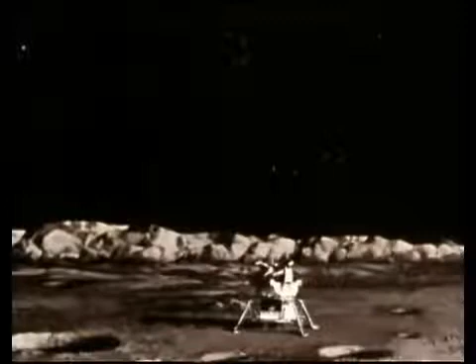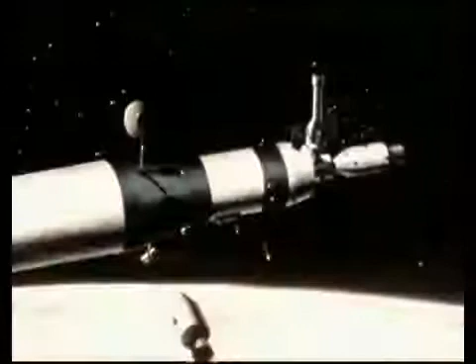Landing men on the moon will be a truly great achievement, but only the beginning of a new era in space exploration. No one can predict the exact missions that will follow in the years and decades ahead. But the most exciting possibilities will require the acceleration and deceleration of very heavy loads, such as the maneuvering of large Earth-orbiting spacecraft.

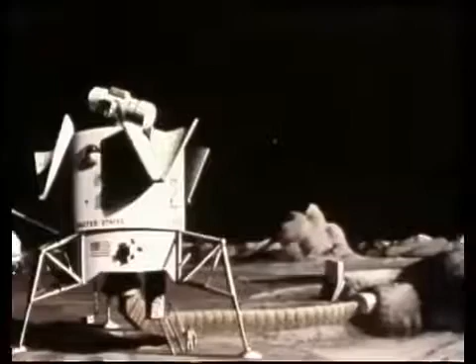The transportation of large amounts of equipment and supplies to the lunar surface, and the sending of heavy spacecraft to the planets.

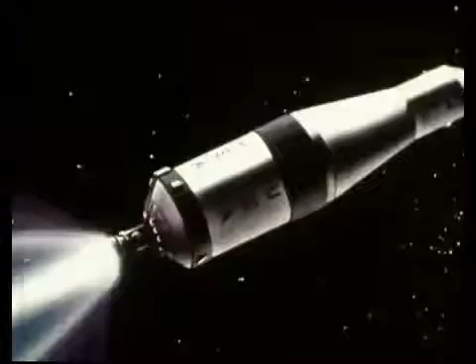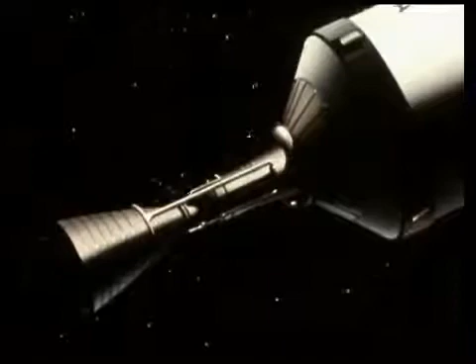Today's missions are being accomplished with rockets that burn chemical fuels. But chemical fuels are heavy, and the cost of putting each pound into Earth orbit is very high. Nuclear rockets, when perfected, can provide the same propulsion energy with less overall weight. They will expand our ability to explore space.

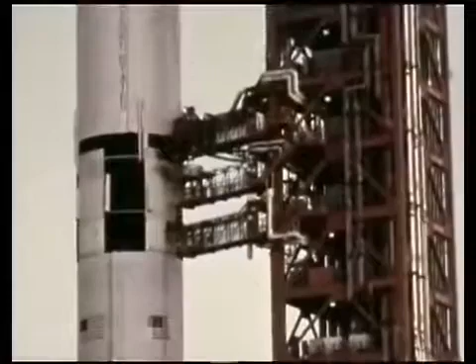This is Saturn V, the most powerful launch vehicle being built by the United States. A three-stage rocket that will place the Apollo spacecraft in the vicinity of the moon. The total weight of Saturn V is about 6 million pounds. Its three stages have chemical engines that burn fuel to generate thrust.

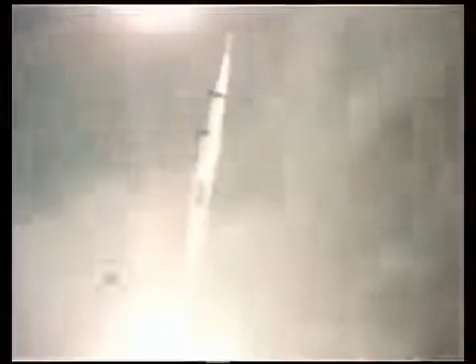The first and second stages provide most of the energy needed to put the third stage and the payload, about 250,000 pounds, into Earth orbit. At present, only chemical rockets can provide the high thrust needed to do this job.

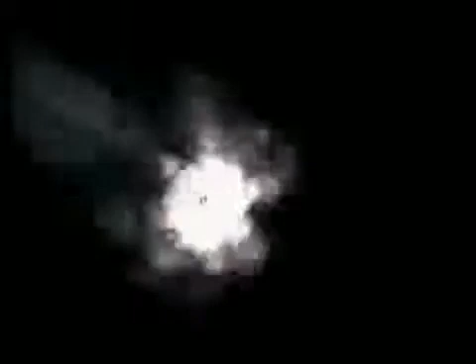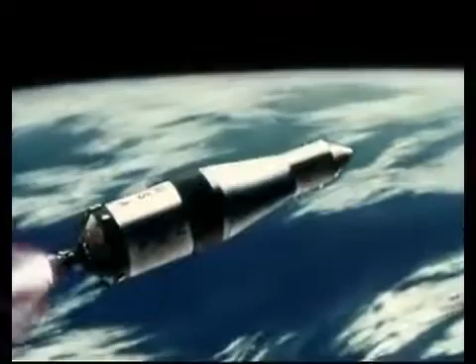The third stage accelerates the payload to the velocity needed to get it to its destination. Here, travel time and payload weight are determined by the efficiency with which the propellant is converted into thrust.

By substituting a nuclear third stage for Saturn V, the velocity of a given payload can be greatly increased, cutting travel time for some missions in half. This is particularly important in sending deep space probes to Jupiter and beyond.

Or if shortening travel time is not essential, propellant weight can be traded off for an increased payload weight. This is important for a lunar supply mission, Earth orbital operations, and some unmanned missions to the planets.

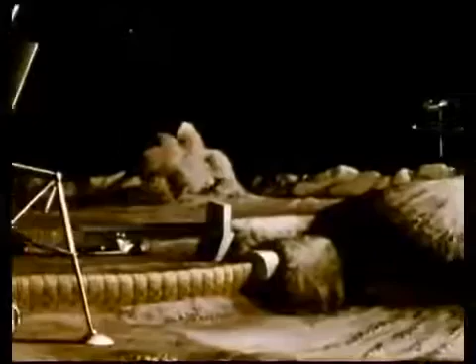Why is the nuclear rocket so much better than the chemical rocket? In rocket propulsion, exhaust velocity determines propulsion efficiency. At a given temperature, the lighter the exhaust gas, the higher the exhaust velocity. And the higher the exhaust velocity, the more thrust is generated for each pound of propellant consumed per second.

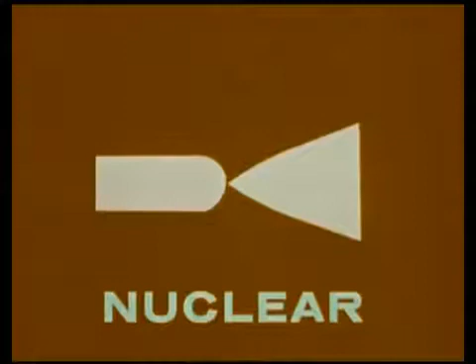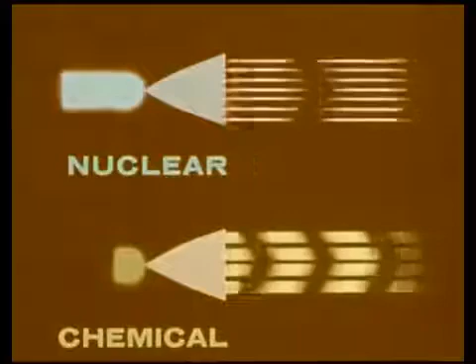The nuclear rocket merely heats hydrogen, the lightest element of all, and expels it at tremendous velocity. Chemical rockets burn fuel to produce exhaust gases that contain heavier elements. So at the same exhaust temperature, the exhaust velocity is much lower, and each pound consumed per second produces less thrust. Rocket efficiency is stated in seconds of specific impulse.

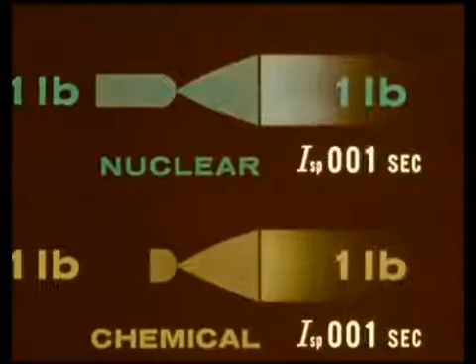This refers to the time in seconds that 1 pound of propellant will deliver 1 pound of thrust. The higher the seconds of specific impulse, the greater the propellant economy. Our best chemical rockets of today are limited to a specific impulse of about 450 seconds, and only slight improvement can be expected.

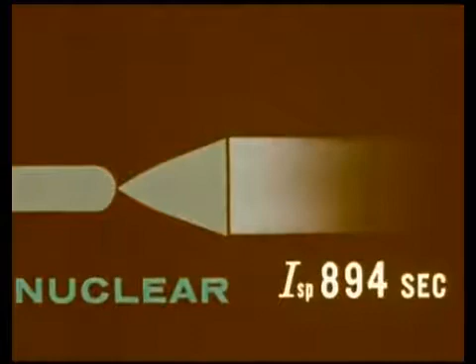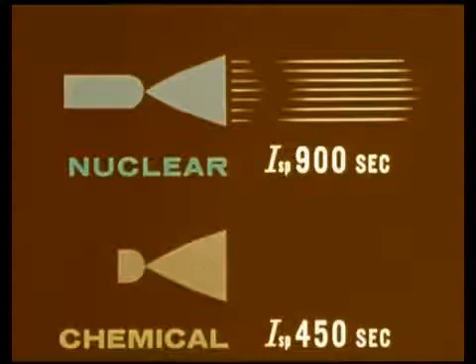On the other hand, full-scale nuclear reactor tests have achieved 800 seconds, and laboratory tests promise even more, perhaps as much as 900 seconds. This means the nuclear rocket, with its lightweight, high-velocity exhaust, will use propellant about twice as efficiently as chemical rockets. This, then, is the principal advantage of nuclear propulsion.

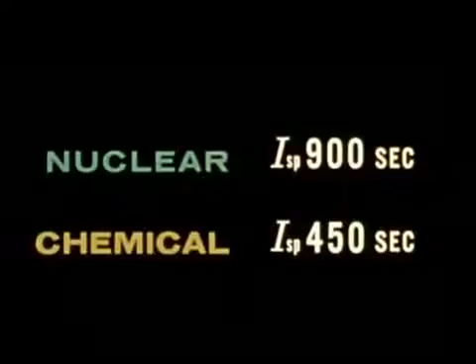It was at the AEC's Los Alamos Scientific Laboratory, high in the mountains of New Mexico, that the first steps were taken. Here, in the mid-1950s, scientists set about to determine if nuclear energy really could be used to provide rocket propulsion.

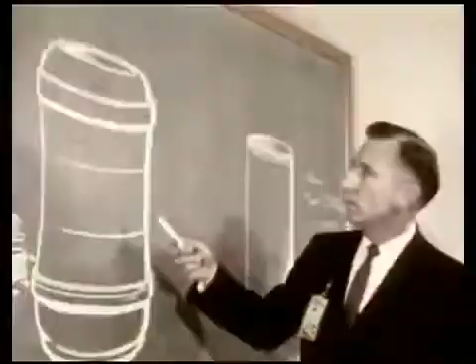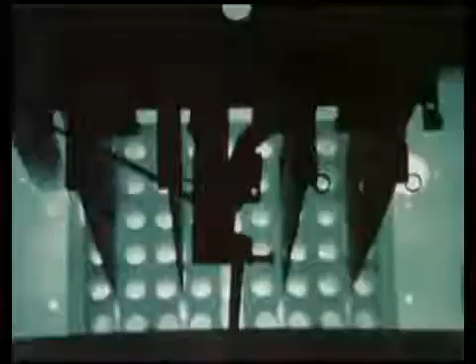Theoretical studies and early experimental work revealed many problems that would have to be solved. Problems in reactor design, material, radiation, structures, control, to name but a few. The nuclear rocket was found to be feasible.

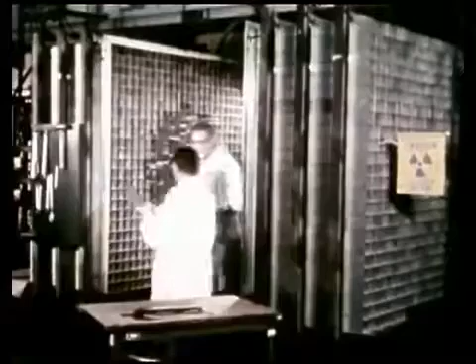A series of experimental reactors was planned to convert theory into workable hardware. Optimum reactor designs were worked out by analysis. Prototypes were built. A comprehensive test program was started.

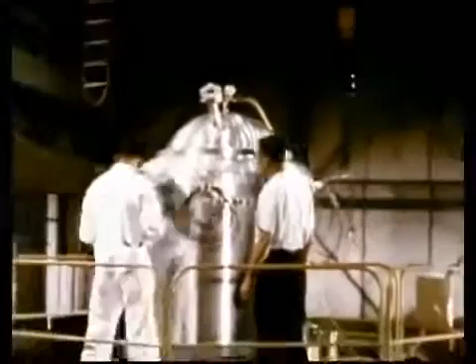These reactors, called Kiwi, were to be used to prove out design and operational concepts. They would be built only for ground testing.

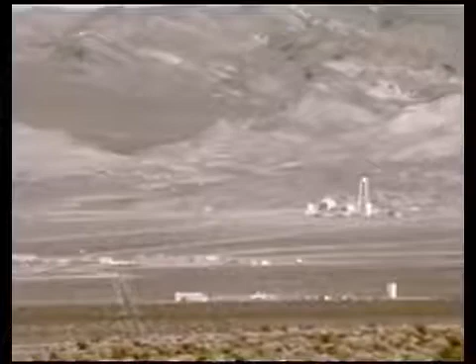All Kiwi power tests took place at the Nuclear Rocket Development Station at Jackass Flats, Nevada. Here in the desert, scientists and engineers checked the actual performance at various power levels and for various time periods.

Each experimental Kiwi reactor was received in sections, assembled and checked out in a special reactor maintenance, assembly, and disassembly building called simply RMAD.

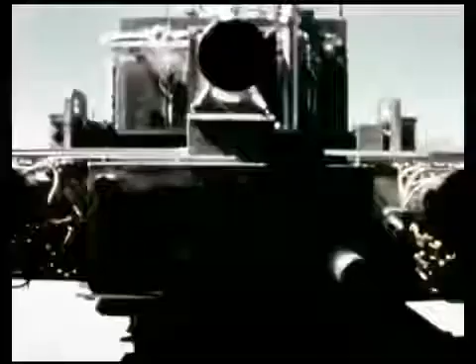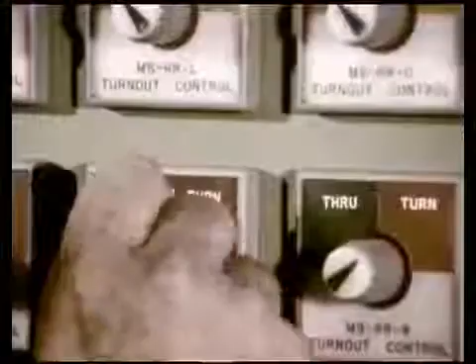When the reactor was ready for testing, it was placed nozzle up on a special rail car and delivered to the test stand a mile or so away. This car could be controlled from a remote station. Liquid hydrogen from nearby storage tanks was pumped through the reactor.

First tests were begun in 1959 and were run to the 100 megawatt level, about 1/10 of Kiwi's ultimate goal of 1,000 megawatts.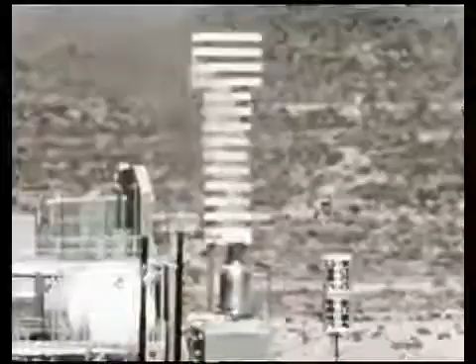Later tests, beginning in 1962, operated at the full 1,000 megawatts.

Films of these early tests show the flaming torch on the test stand that burns off the hydrogen exhaust gas and prevents an explosion hazard to the test facilities.

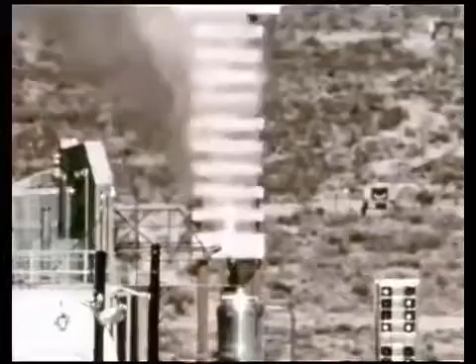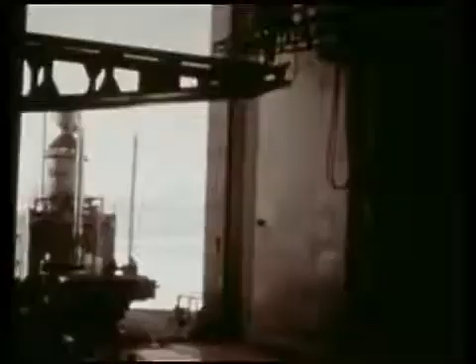Upon completion of these tests, each reactor, by then radioactive, was transported by remote control back to the RMAD building for disassembly and inspection. Here, men working behind shielded walls used remote-controlled manipulators to remove the components for careful checking and analysis. Each test firing added information that helped scientists evaluate the reactor's performance and enabled them to make adjustments and corrections before the next reactor was assembled.

But not all tests showed perfect performance. In this one, for example, the flashing in the exhaust gas indicated a structural breakup caused by excessive vibration. Extensive redesign and testing were needed to correct the flaw.

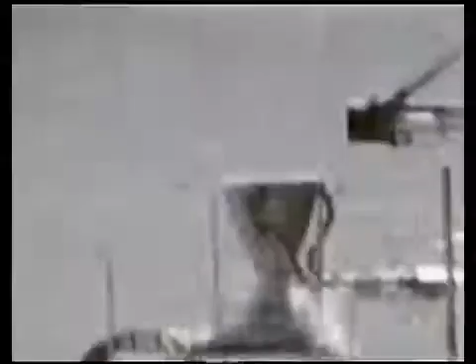And in this test, a hydrogen leak caused a fire on the test stand. Again, a correction was made.

Each test brought the scientists a little closer to the performance they were seeking, until finally, in September 1964, the 8th Kiwi reactor was brought up to full power and held for 8 minutes. A few weeks later, it was restarted and operated at full power for 2.5 minutes. Specific impulse, about 750 seconds.

This concluded the Kiwi test series. It had proved that a nuclear reactor could be built that would power a spacecraft.

The next step, already underway, was to develop complete engine technology. This project was called NERVA, Nuclear Engine for Rocket Vehicle Applications. It was to be a combined industry-government effort headed by the Space Nuclear Propulsion Office, a joint NASA and Atomic Energy Commission activity. The principal contractors were to be Aerojet General Corporation and Westinghouse Astro-Nuclear Laboratory.

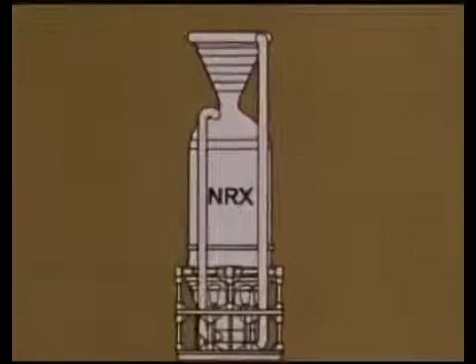The NERVA technology reactor, given the letter designation NRX, was essentially the same as Kiwi, but now the contractors had to extend its lifetime and put it into an engine configuration.

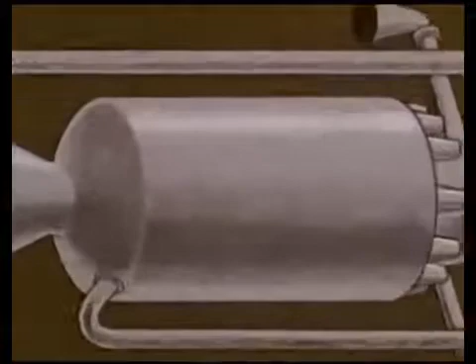Here is how the nuclear rocket engine will work. The reactor is a solid core, heat exchange type, cylindrical in shape. Fission of uranium atoms in the core is the source of heat. A reflector made of beryllium surrounds the core.

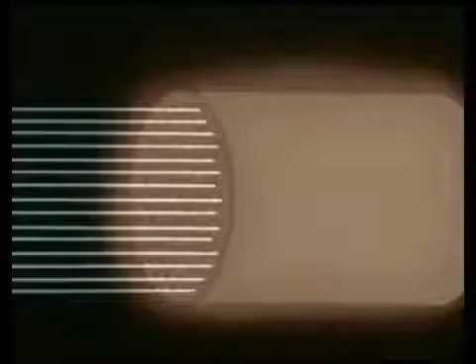The core consists of many graphite elements impregnated with the uranium-235 fuel. The core contains a number of channels running down its length. Hydrogen passing through the channels picks up heat generated by the fission process. The channels are coated with niobium carbide, a material which resists the corrosion that would occur if the hot hydrogen were allowed to come into direct contact with the hot graphite.

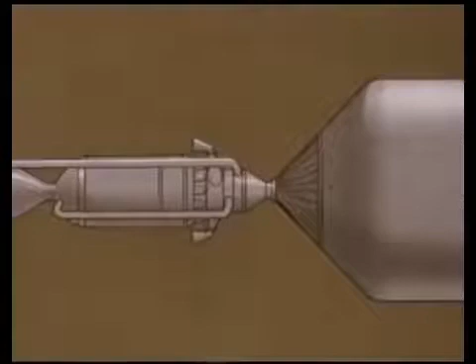The hydrogen is stored in a liquid state to achieve the lowest possible volume. The flight model will use about 1/3 of a million gallons for a 30-minute firing.

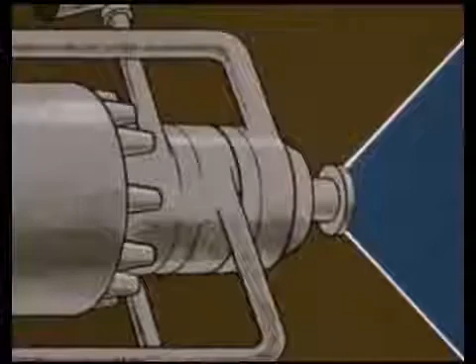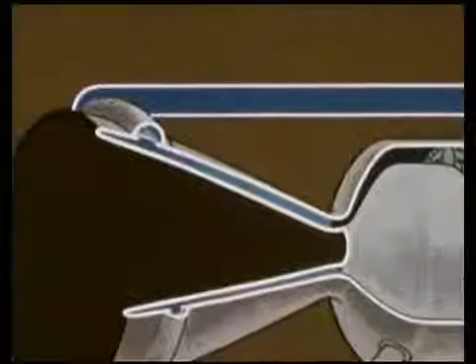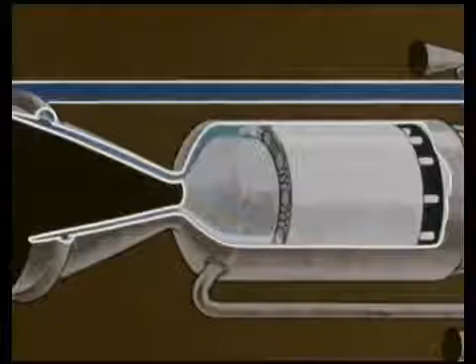To start the engine, the cold liquid hydrogen at -420 degrees Fahrenheit moves through a pump down to the nozzle, through internal passages in the nozzle walls, and back up inside the reactor pressure shell and reflector. This cools the nozzle, the reactor shell, and the reflector, and at the same time warms the hydrogen.

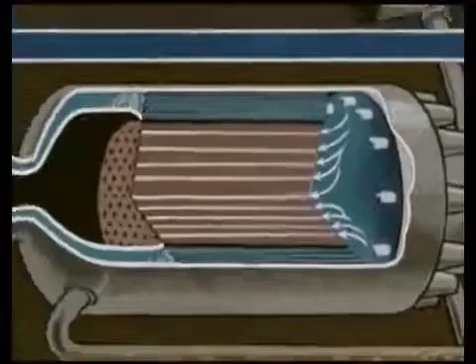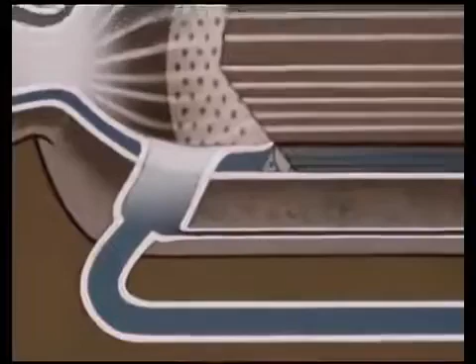The hydrogen then passes through the hot fuel elements where it is heated to about 4,000 degrees Fahrenheit. From there, it is expanded through the nozzle to provide thrust. The bleed line carries some of the hot hydrogen back to drive the turbo pump. The whole engine system is amazingly compact for a nuclear power source.

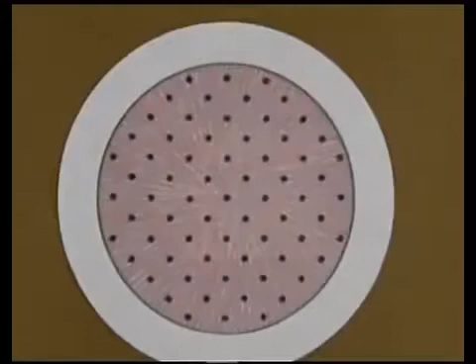The reactor works through fission of uranium-235, which constantly emits nuclear particles called neutrons. When reflected back toward the reactor, these particles will set up a chain reaction, generating terrific heat. The heat is controlled by rotating rods installed in the beryllium reflector around the reactor.

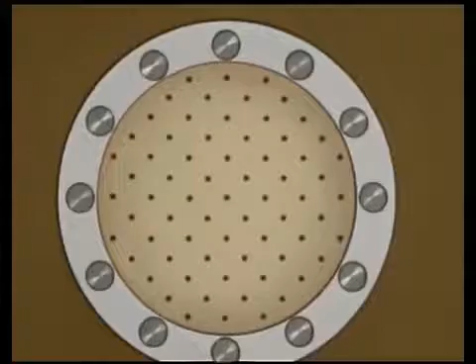The rods are also made of beryllium, but one side is coated with boron, which absorbs neutrons. Initially, the rods are turned so the boron side is toward the fuel elements, and sufficient neutrons are absorbed to prevent nuclear fission from starting.

Beryllium reflects neutrons. By turning the beryllium side toward the elements, a point is reached where sufficient neutrons are reflected for fission to begin. The amount of heat produced depends upon the position of the rods. Heat increases as more of the beryllium side turns toward the core.

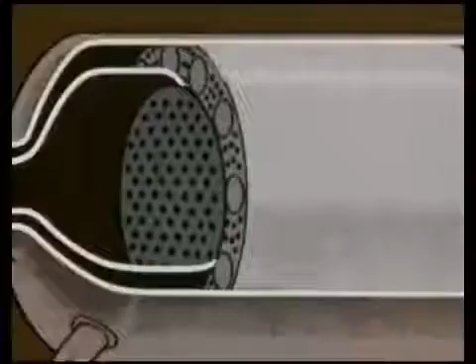When the desired rate of heat production is reached, the rods are turned back to stabilize it. Heat decreases as the rods are turned back. When the boron side absorbs enough neutrons to halt the fission process, heat is no longer generated. These rods can be operated by remote control.

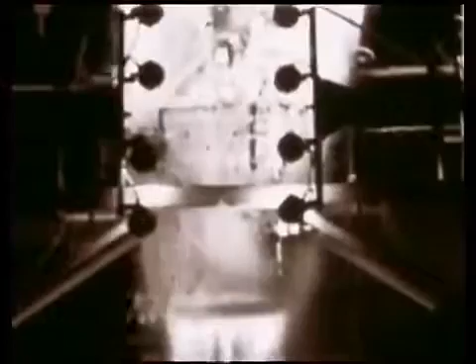Test facilities for engine components were built near Sacramento, California. The problem? Get adequate performance with minimum weight. The pump must move huge quantities of liquid hydrogen under pressure at -420 degrees Fahrenheit, while the hydrogen-cooled nozzle must expand high-pressure gaseous hydrogen at 4,000 degrees to low pressure.

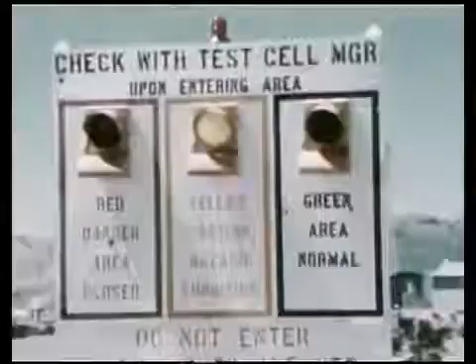The reactor was designed to meet the structural requirements of ground handling, launch, and spaceflight. In a late 1965 test, it operated intermittently for an hour, including 16 minutes at full power. But in that test, as in all reactor tests before it, the hydrogen had been forced through the reactor by test stand pumping facilities

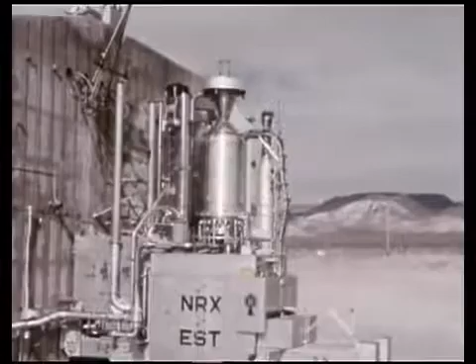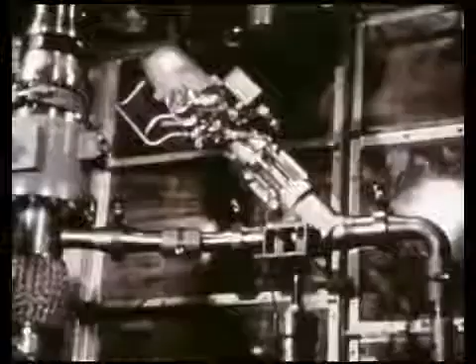instead of its own turbine-driven pump. In early 1966, the new technology reactor and the chief engine components, including the turbo pump, were assembled for test. It was called a breadboard because they were not arranged as they would be in an actual engine. It would be the first self-starting test, and it was a vital step in the nuclear propulsion concept.

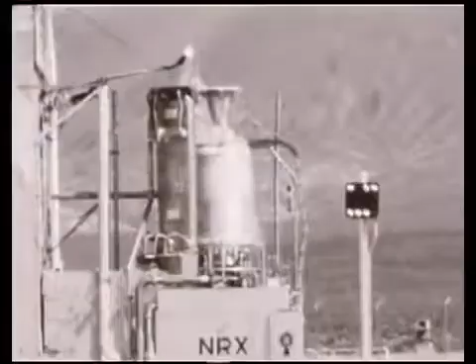This engine test model started perfectly and increased to full power, proving that a nuclear rocket could be started by its own pump. During a 2-month period, it was started and stopped 10 times and operated at different power levels for a total of 110 minutes, 28 minutes at full power.

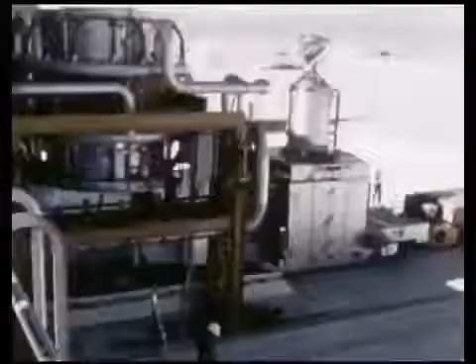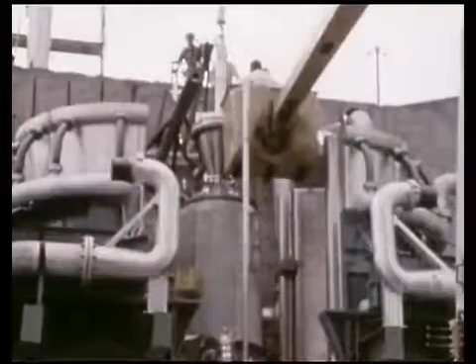Technology had now advanced to the point where performance limits could be extended. Work was already underway to increase reactor power and operating time. In February 1967, this reactor, the Phoebus 1B, was operated at a power level roughly equivalent to 75,000 pounds of thrust. And in December 1967, this reactor, the NRX A6, was operated at full power for an hour.

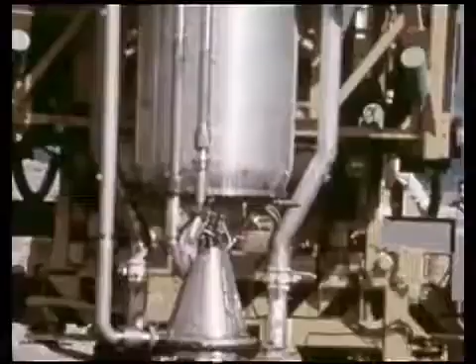Also in 1967, a new test stand was completed that would permit a test engine to be fired nozzle down into a vacuum chamber below, at least partially simulating the space environment. In early 1968, the first ground test engine was mounted in the new stand. Its success was a new milestone along the long road leading to a flight engine.

Heavy shielding was used in this test engine to protect some of the components from intense radiation. In flight engines, all components will be radiation hardened and less shielding will be needed. These tests will complete the technology for a nuclear rocket engine for application to space missions of the late 1970s and beyond. Its thrust will be approximately 75,000 pounds.

For missions that require higher thrust, 2 or more of these engines may be used in a single stage, or several engine stages may be assembled side by side. This versatility will give us the capability to perform a variety of advanced missions.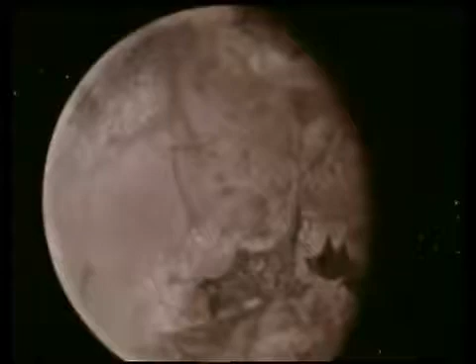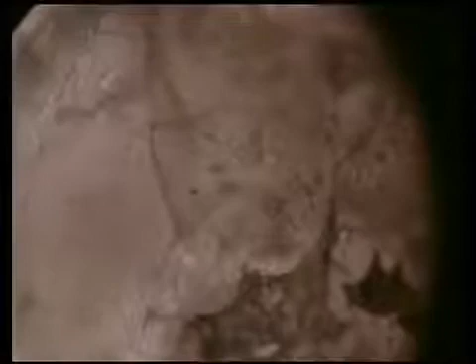Someday, a manned trip to Mars and return may become the mission assignment. Exactly how it would be carried out depends upon a number of factors. But here is one way it might be done with nuclear rocket propulsion, using the technology developed for earlier missions. Using several Saturn V launch vehicles, components of the huge spacecraft would be placed into Earth orbit and assembled.

Separate nuclear stages might be provided for each major step of the mission. The first stage might consist of 3 clustered rockets for departure from Earth orbit. 2 other nuclear stages consisting of 1 engine each would be used in the vicinity of Mars.

The first stage cluster fires to accelerate the spacecraft to the velocity needed to get to Mars in the time that was decided upon, say 200 days. At burnout, the first stage cluster is jettisoned and goes into orbit around the sun. Mid-course correction is made by chemical rockets.

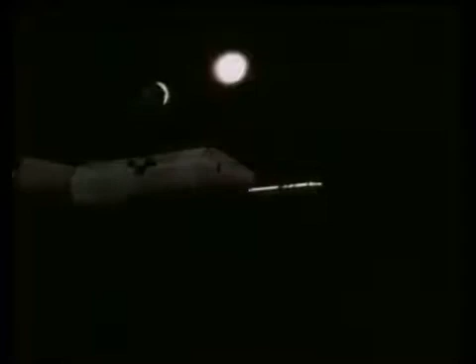About 200 days later, the space vehicle approaches Mars. There it is slowed down by a single nuclear rocket and enters an orbit around the planet. The used second stage is put into a higher Mars orbit than the space vehicle. A chemically powered module departs for the planet's surface.

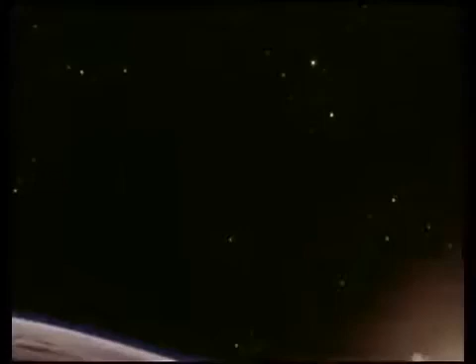For the first time, men from Earth will set foot on another planet.

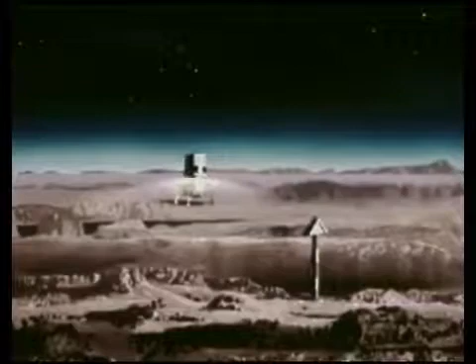For the return trip, the module is lifted by chemical power back into a Mars orbit, where it docks with the main space vehicle. The men transfer to the main craft and jettison the module, leaving it in an orbit around Mars. A third nuclear rocket accelerates the vehicle for the return trip.

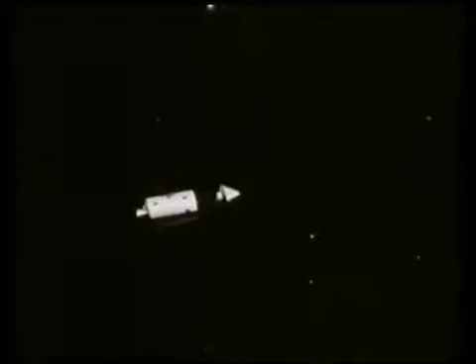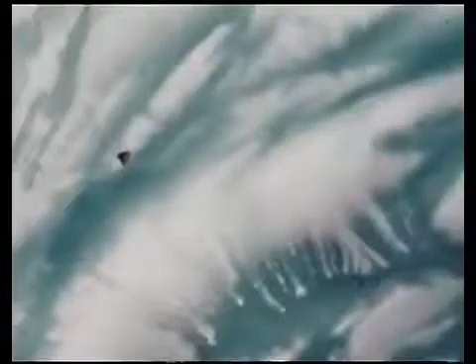And it is jettisoned. Again, mid-course correction is made chemically. Just before reaching the vicinity of Earth, the crew transfers to a re-entry vehicle and jettisons the large spacecraft. Chemical rockets slow down the vehicle to re-entry speed, and they are jettisoned. After deceleration through the atmosphere, the re-entry vehicle returns to the Earth's surface by parachute.

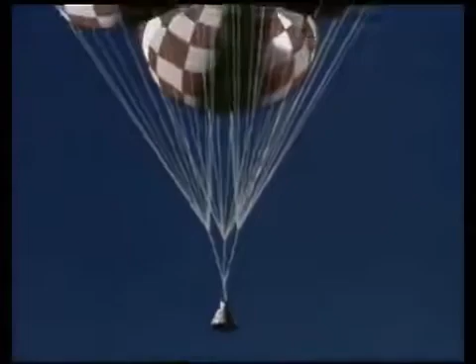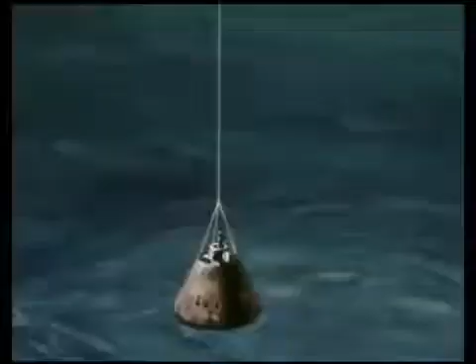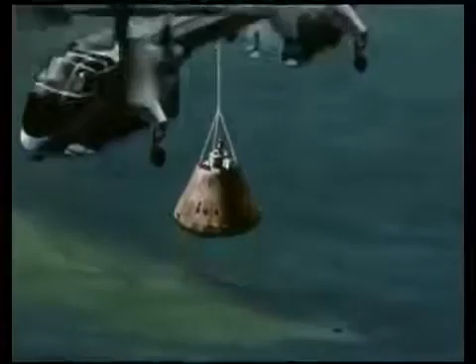A trip to Mars and back, for centuries a dream of earthbound men, is now much closer to reality. Of course, there are many, many other problems to be solved before such advanced space missions can be attempted. Life support systems for extended space journeys, more accurate space navigation, communication systems, power supplies, and so forth. But any successful advanced mission must begin with propulsion, the power to get there and back.

Lower overall weight, larger payloads, shorter travel time. These are the chief advantages of nuclear propulsion. The technology needed to build a nuclear rocket is well advanced. It will be available when this nation determines its next great objective in space.